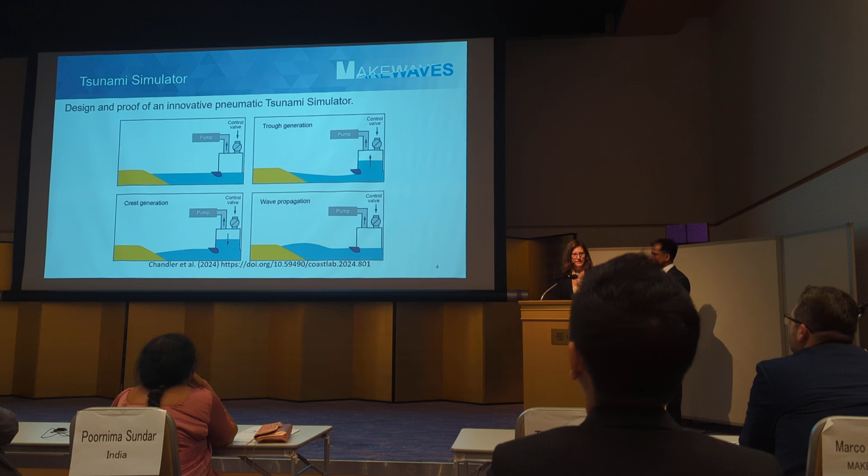Our work was actually inspired by our work in the field. We have participated in just about every tsunami disaster that has happened since the 2004 Indian Ocean tsunami, with the most recent mission looking at, 20 years later, the recovery of Banda Aceh. We go out there to learn engineering lessons from the impacts. Indeed our work was inspired by the 2004 Indian Ocean tsunami, and that's why it's extremely important and significant to us that this year, the anniversary, has brought this award to our work. A keystone of our research is the tsunami simulator, which we developed with HR Wallingford.

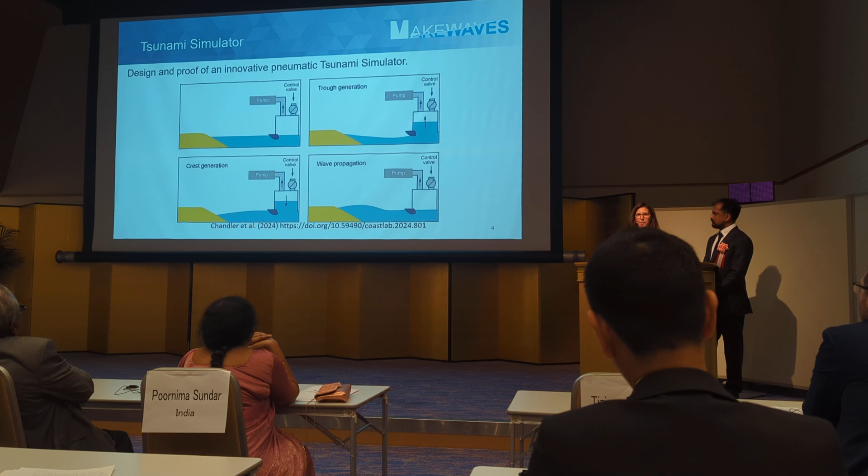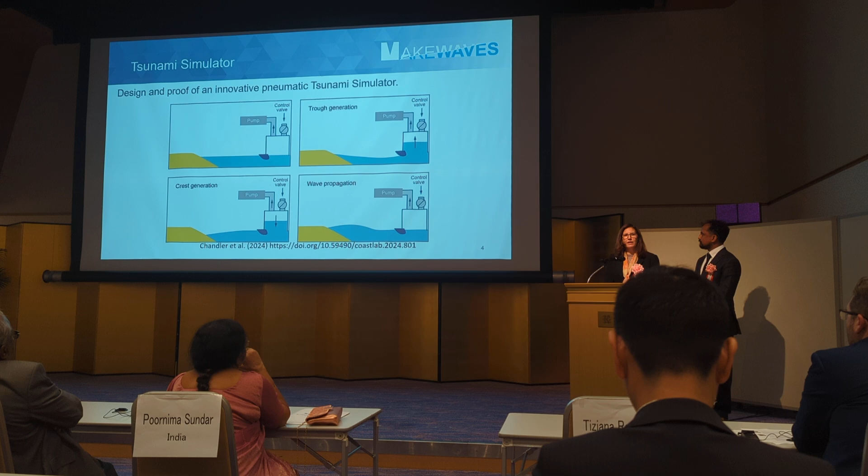The idea for the tsunami simulator came from a conversation I had with Professor William Allsop many years ago, returning from the field after seeing the disasters in Sri Lanka and Thailand following the Indian Ocean tsunami, and asking why can't we simulate tsunamis in the laboratory? William said, well, wave paddles just can't generate very, very long waves, and tsunamis are extremely long waves.

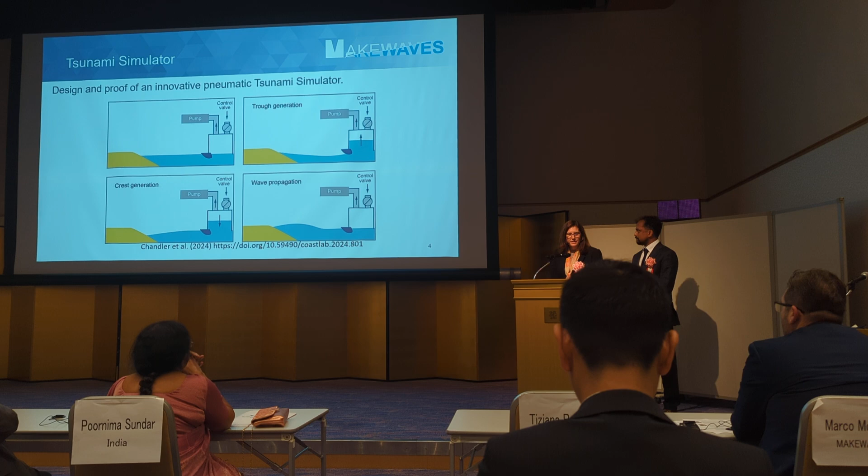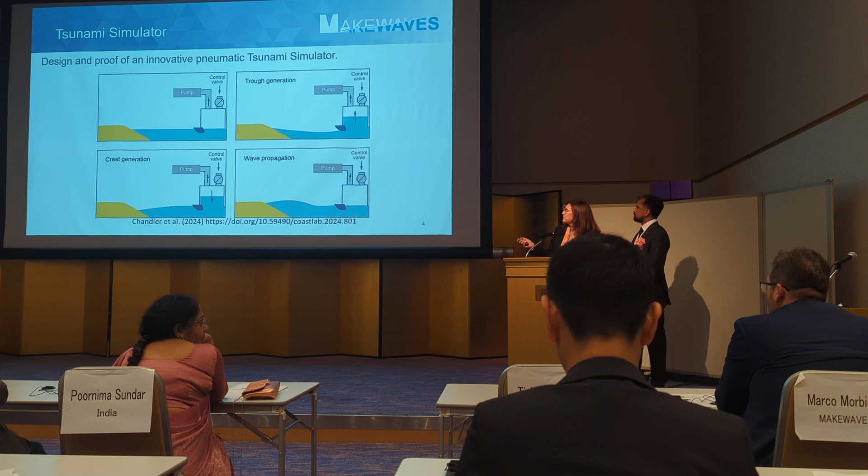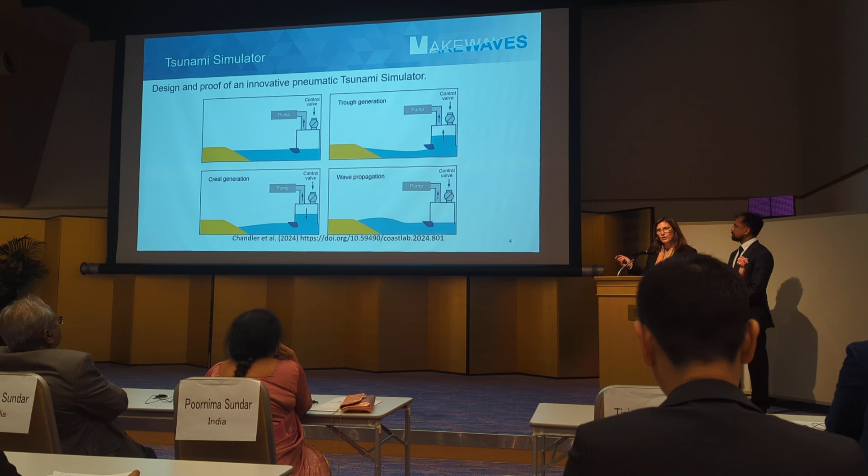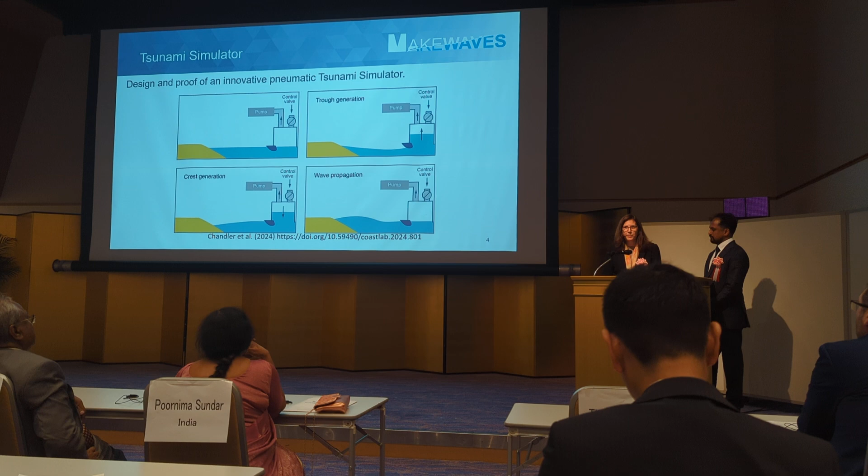Inspired by that, we came up with a new pneumatic system for generating tsunamis, whereby you have a tank at one end of the flume, equipped with an air pump that extracts air from inside the tank, and the pressure within the tank is regulated by opening and closing an air valve. By controlling the pressure inside the tank, we can raise and lower the water in a controlled manner, creating waves that exit the bottom of the tank through an opening with a wave shaper. Because we're moving extremely large quantities of water, we are able to generate extremely long waves.

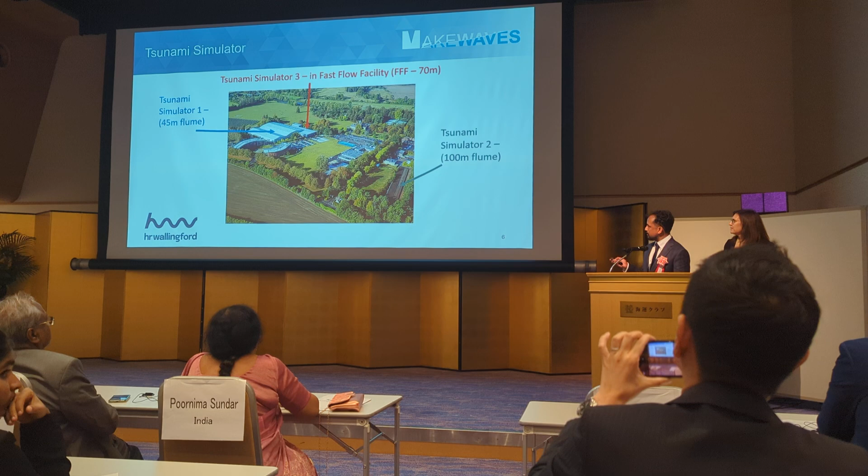Thank you, Professor Rossetto. The facilities we've been using are based at HR Wallingford, a beautiful site in Oxfordshire. There are three different simulators we've used to date: the first is a 45-metre long flume, the second is a 100-metre long flume, and the third is in the flagship fast flow facility at Wallingford. This slide shows that in a bit more detail.

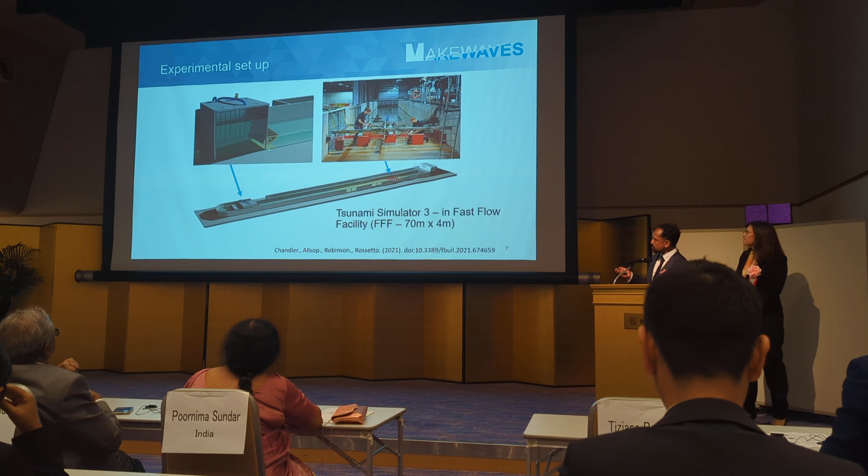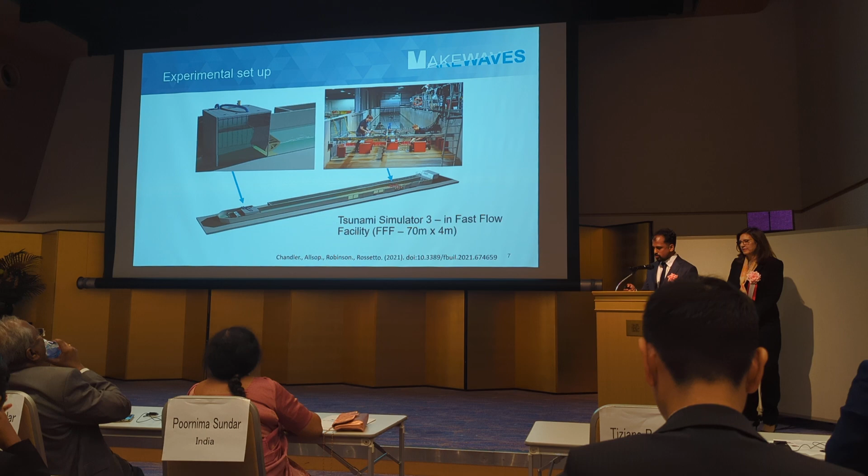This is the generator - a computer image of a cross-section showing the water coming in and out. That wave is propagated down the flume, and as it propagates, it impinges on our model coastline, our built environment, where we have instrumented structures to measure the forces on.

Using this facility - here's a video - we've done a number of different tests really trying to understand the physics of tsunami waves as they interact with the built environment. If we can understand the physics better, we can start to come up with better mitigations and better designs, understanding how the tsunami delivers damage.

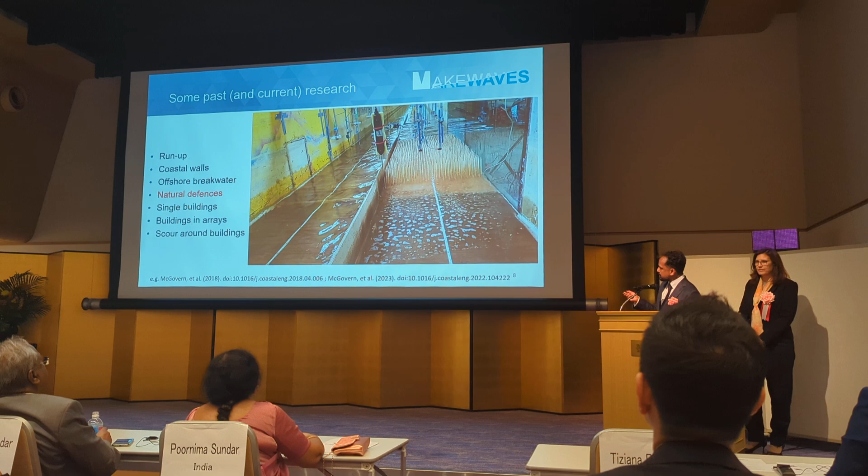We've done tests on run-up, seawalls, offshore breakwaters, and this particular test shows the effect of model mangrove forests, or roughness. Compared to the smooth bed here, there is a mitigation - a delay in the onset of the wave as it climbs up the slope.

We've tested single buildings, buildings in arrays, and also scour. Scour is one of the major causes of failure of structures in tsunamis in the field - it's the sediment transport around the base of the foundation of structures.

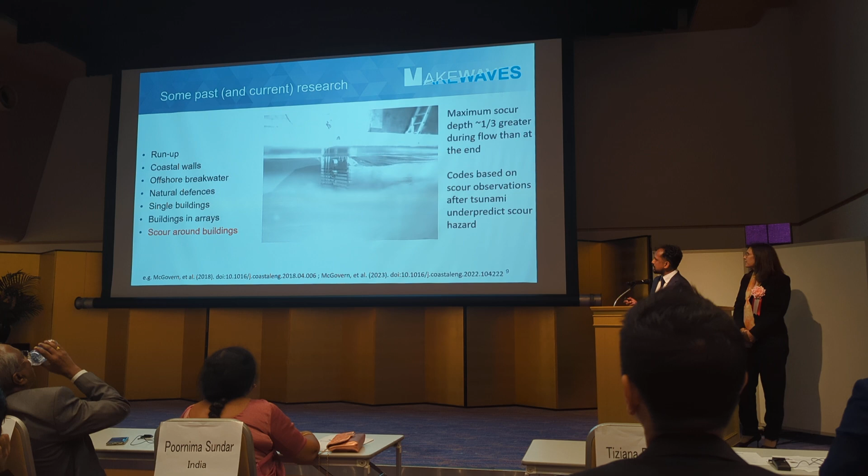This video really nicely shows the unique capability of the tsunami generator in how it can generate these very, very long waves, in which the height and velocity of the water increases quite slowly, but in a way which is physically scalable to the real world. You can see there's a lot of sediment transport in this case.

One of the main things we found about tsunami scour is that the actual maximum scour depth during a tsunami event happens during the event, not after it. So much of our understanding from field surveys could underestimate the amount of scour by about a third. And I'm going to hand back to Tiziana.

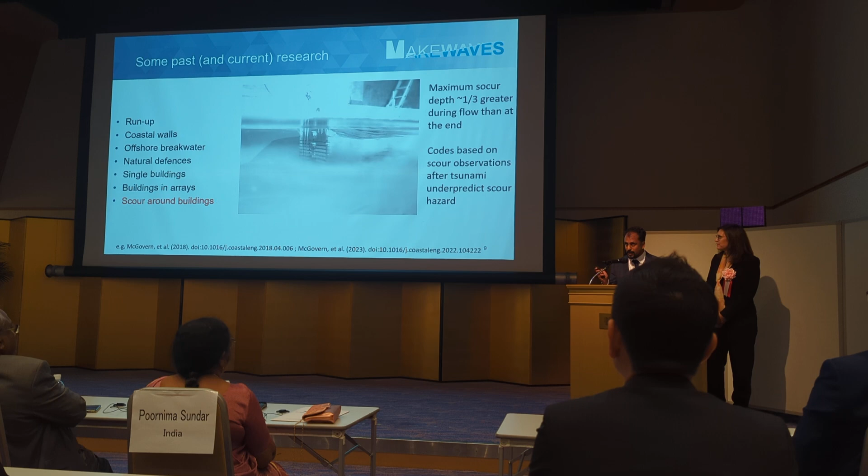So one of the focuses of our research over the past few years has really been looking at the interaction of tsunamis with coastal structures, and in particular buildings. This just shows you an example of a monitored building with the tsunami passing by. From this information, we've been able to understand a lot more of the physics of this interaction.

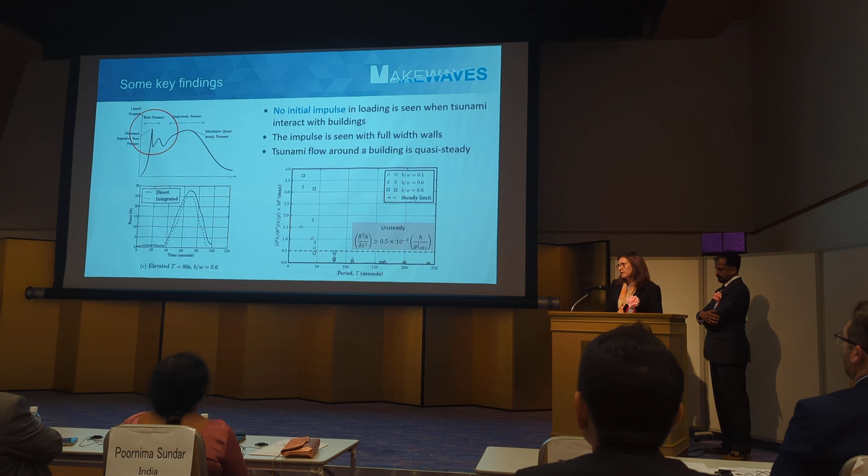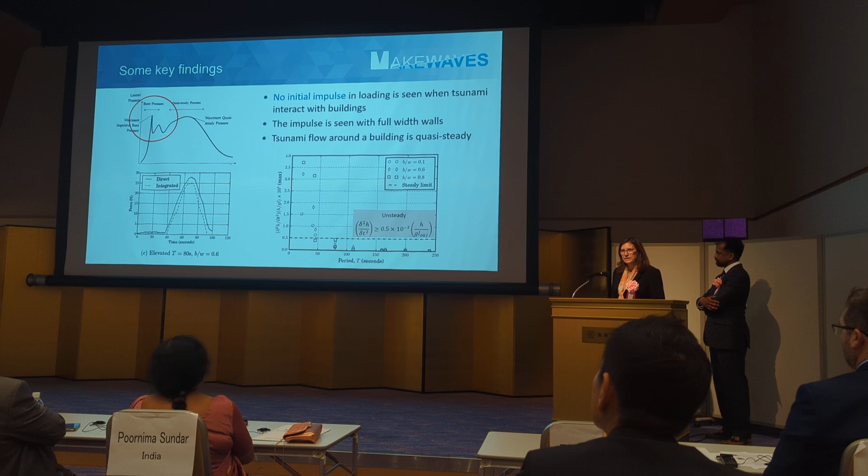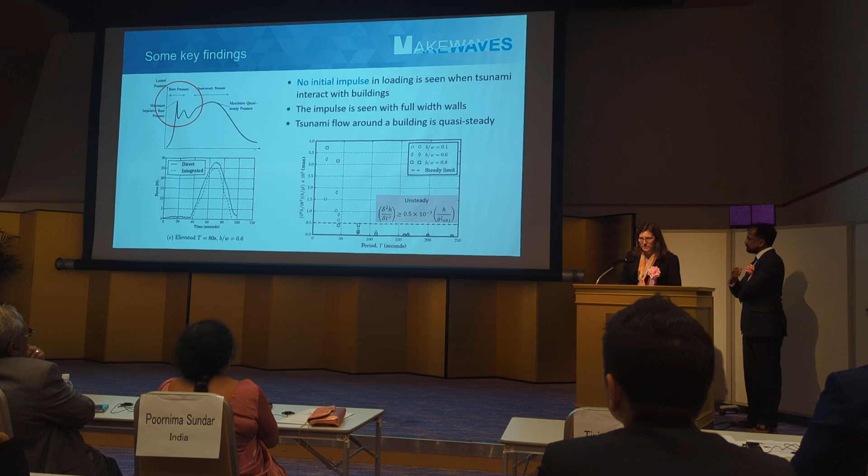In particular, some key findings are that when you have a finite width structure within a flume, like a building, you do not see the initial impulse that is considered within many codes of practice to exist when a tsunami interacts with a building. We've also understood that looking at these extremely long waves we can generate, tsunami flow can be considered to be quasi-steady. So it's not a dynamic flow when we consider the wavelength compared to the width of the structure.

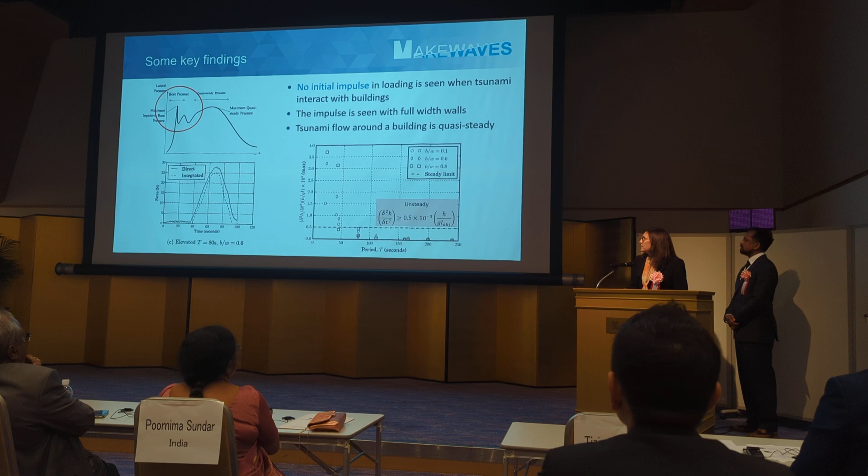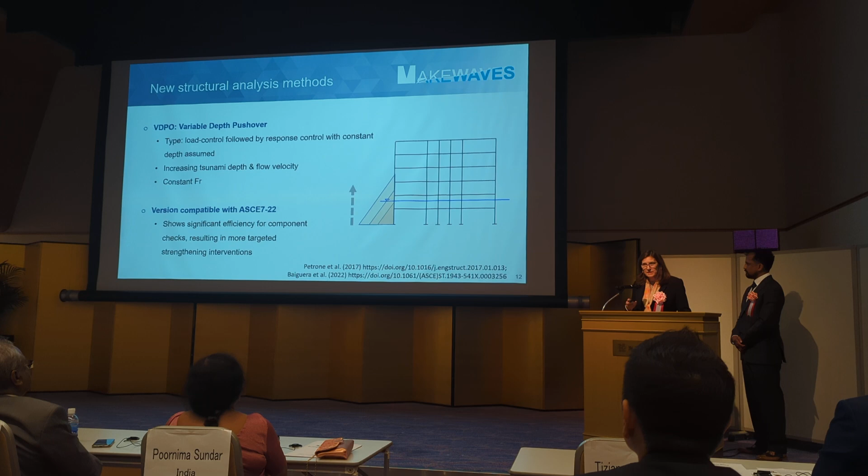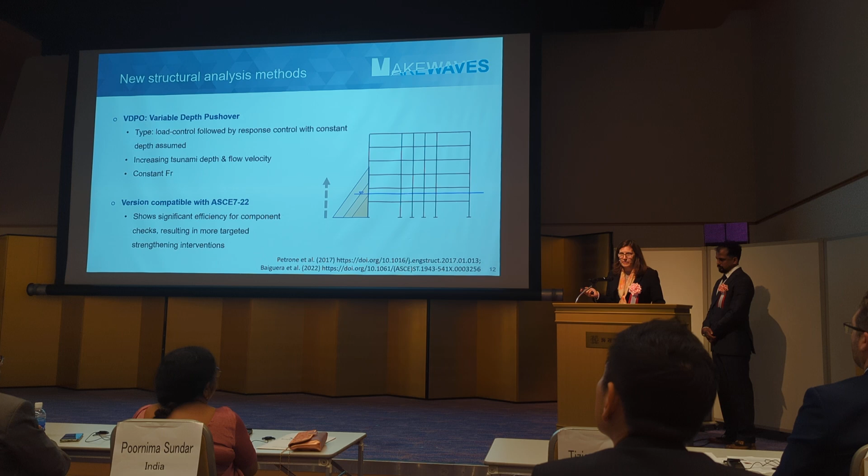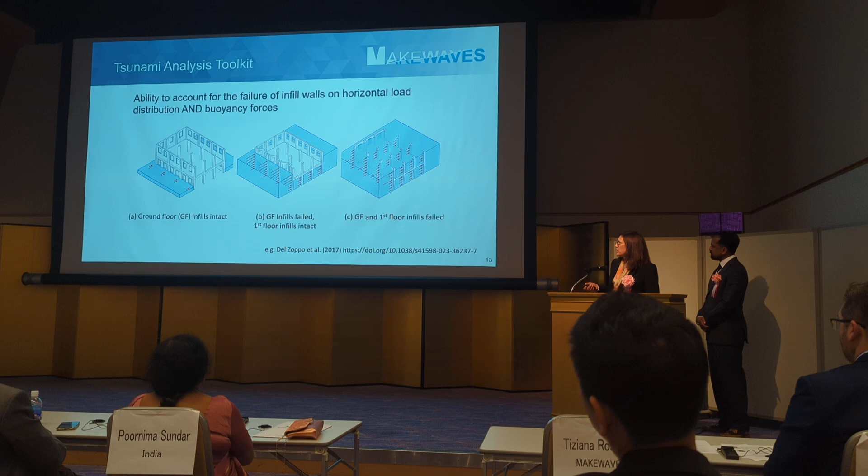By taking that into account, we've been able to develop new structural analysis tools and methodologies. What we call the variable depth pushover is essentially a nonlinear static procedure whereby we increase the water level on the side of the structure, simulating a tsunami interaction. We've developed a method consistent with the American code, ASCE 7, which is now quoted within it. This methodology can consider quite complex arrangements: the breaking of infill walls, the inundation within a structure, and how that changes the horizontal forces, but also the buoyancy forces across the structure. So we can take all of that into account.

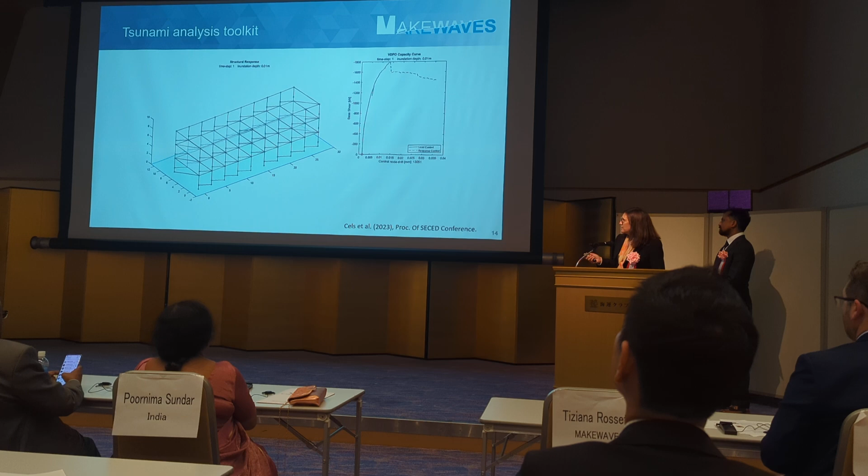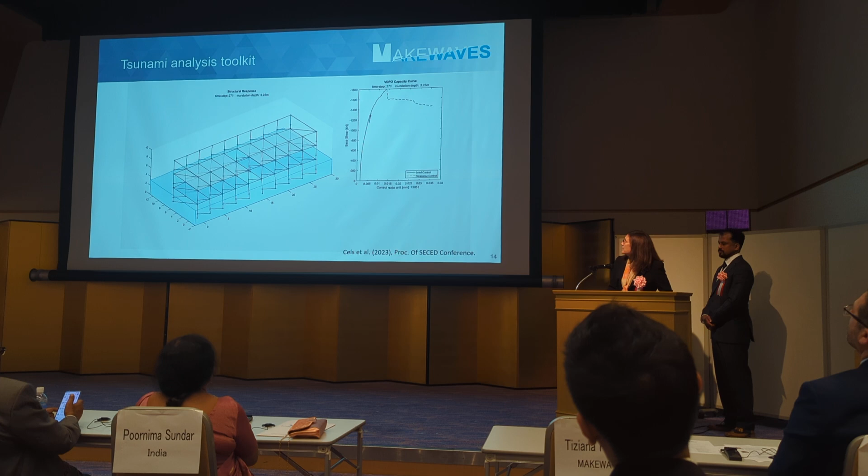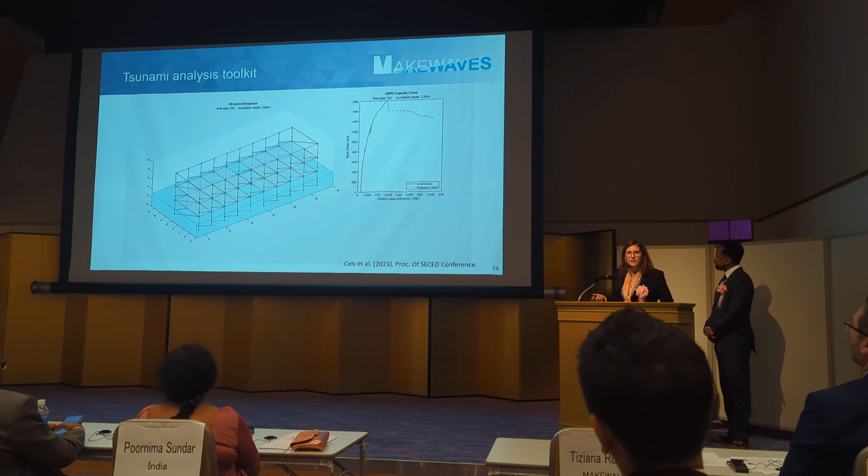I'm going to give you a little example of an animation developed of our methodology. This is a Sri Lankan school that has been modelled, and as you can see, as the water level rises, it increases the force on the structure, and the little dip you see here is where the infill, which is not seen in the picture, breaks. It releases some force, and then the structure takes further load until it fails.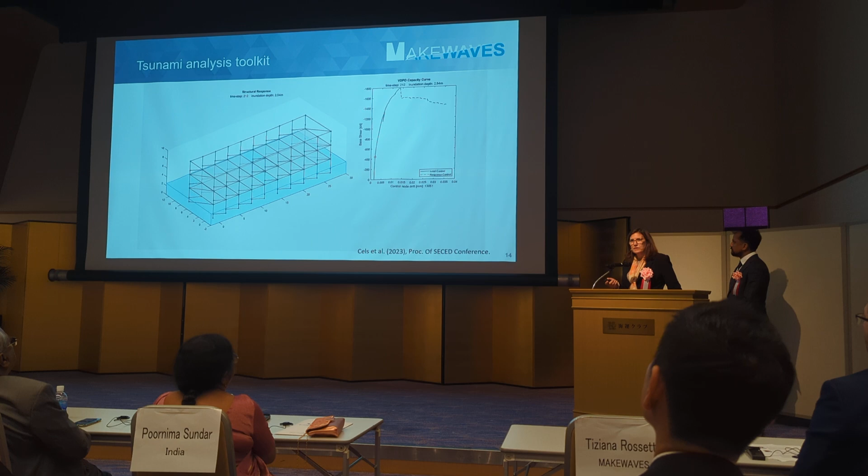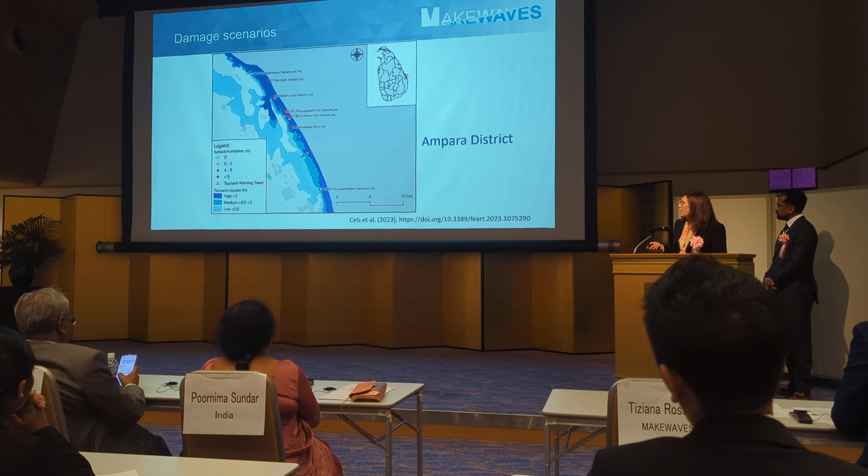By developing this method, we've found an analytical approach to analyze structures and understand their capacity under tsunamis. Harnessing that, we can look at what would happen along a coastline. This is a plot of schools along the Sri Lankan coast in the Ampara district, showing the potential damage from an inundation like the 2004 tsunami recurrence. We're using these tools to talk to communities and decision makers in Sri Lanka, and so on.

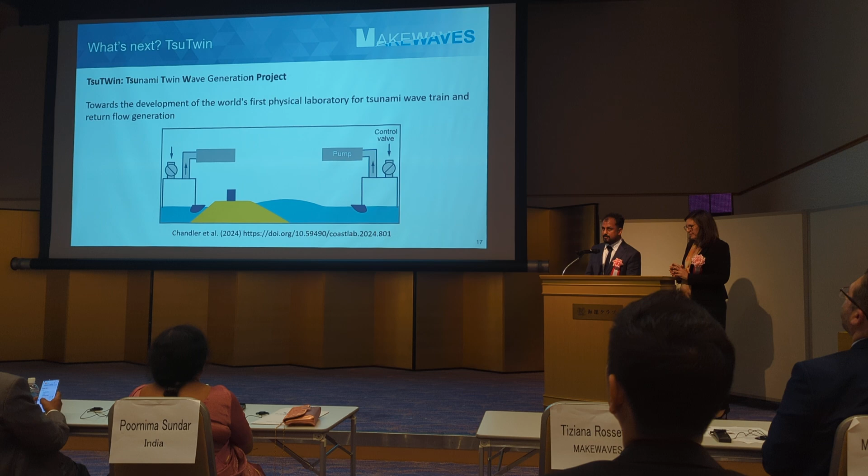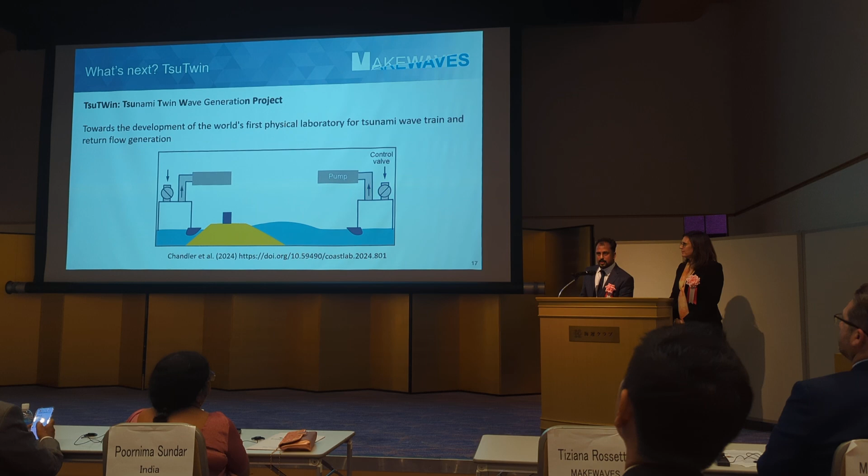So, where does that leave us? We've now got a generating system which works very well in delivering a single wave into the shoreline. But of course, a tsunami is a sequence of waves. All that water that goes in must also come out again, and often there is another wave and subsequent waves after that—what we'd call a wave train. So we are now developing a research project: the tsunami wave train generator.

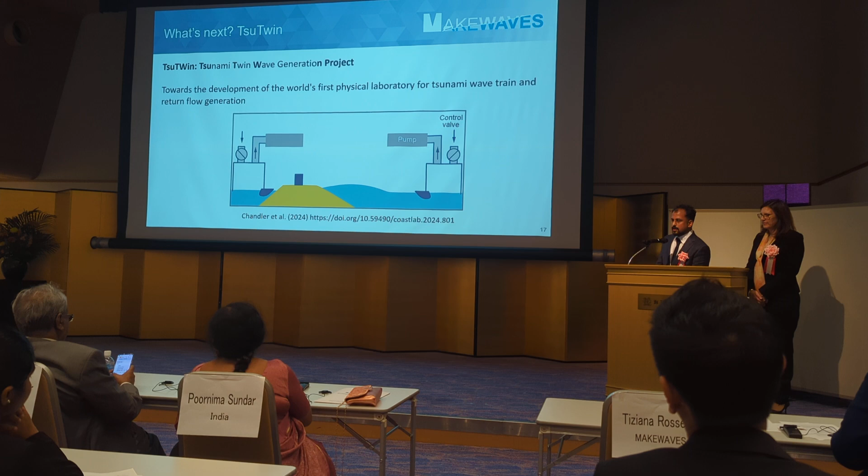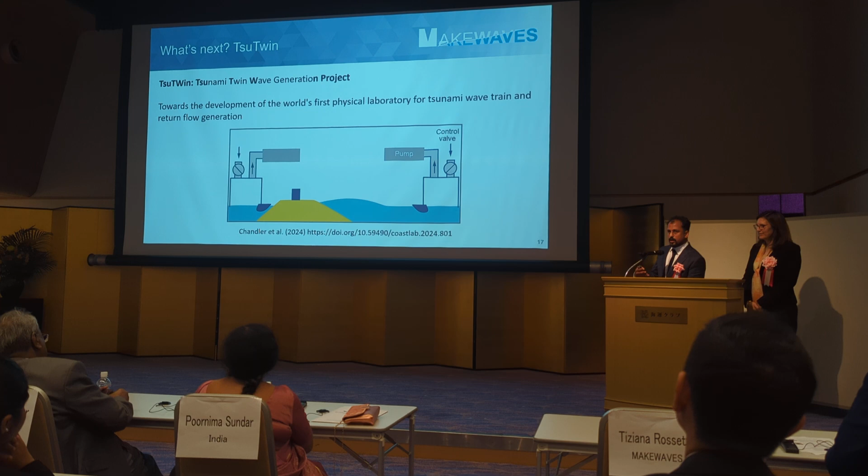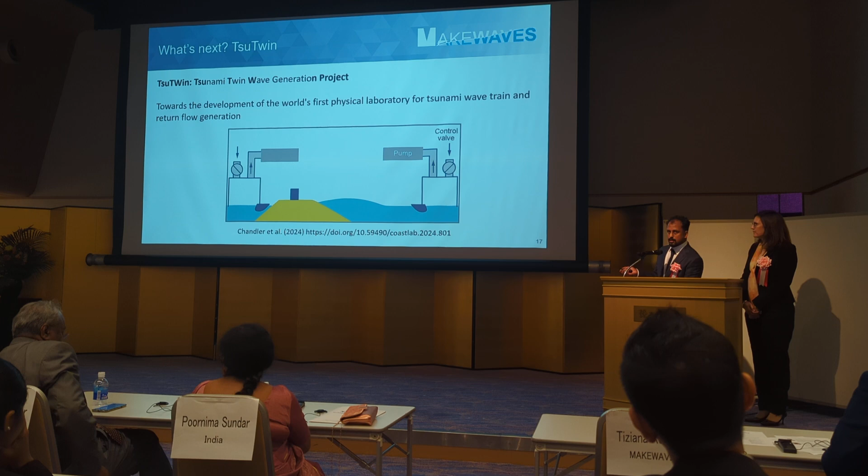This is the Tsunami Twin Wave Generation Project. The idea is that we place a second generator at the far end of the flume, beyond our test structures. That generator is intended to catch the incoming inundation, hold it, store it, and then deliver it back towards the original generator in a physically scalable way. Eventually that original generator would catch it and send it back. So you'd be able to generate the full tsunami interaction with the coastline, the wave train in and out.

We managed to do, just at the end of our recent MAKEWAVES tests, a sort of look-and-see where we installed a second generator. The control system for it is not there yet—we need to develop that, and we need to develop the interaction and how we can model it. But this was to demonstrate whether the concept would actually work.